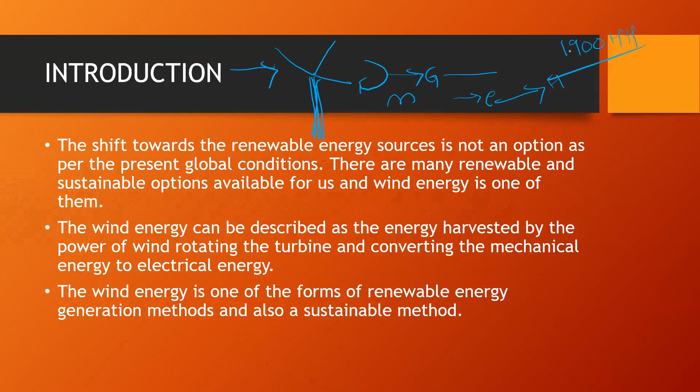The generator uses the mechanical force from the turbine and converts it into electrical energy, which is supplied to regular households. One wind turbine at its full capacity can serve up to a maximum of 1900 households. Wind energy is one of the forms of renewable energy, which is a renewable and also a sustainable method.

The types of wind energy systems. There are two types of wind energy systems, onshore and offshore, based on the placement of wind turbines. The onshore wind energy systems are the regular wind energy systems which we see mostly. These are the most common type of wind energy system, where the wind turbines are installed on land and mostly connected to the grid, and they provide direct distribution of the power for usage.

Mostly, the regular wind turbines are onshore wind turbines. They generate electricity, which is connected to the grid, which supplies our homes for our usage. And there are the offshore wind energy systems, which contain wind turbines anchored to the seabed, as there are much stronger winds over water bodies. In the water bodies, there are high winds with high pressure, so the wind turbines are placed there to get a higher output.

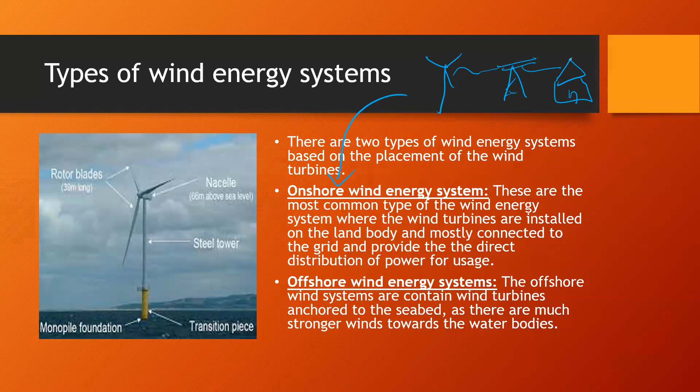The offshore wind energy system. Offshore wind energy is a renewable energy solution with enormous potential. By placing wind turbines at sea, in either shallow or deep waters, we can harness the power of the wind to generate electricity. Offshore wind energy presents several advantages over onshore wind energy systems. One of the most significant benefits is the strength and consistency of wind resources at sea.

Due to the high pressure created by the sea, there are high winds over the sea. So by placing the wind turbines there, we can generate a higher amount of wind energy compared to onshore wind turbines. Unlike onshore locations, which may have variable wind patterns, offshore sites often experience more consistent and stronger winds. This results in higher energy yield and more reliable power generation.

Suppose you place onshore wind energy systems in the plains, on the hills, or near plateaus. The winds change based on the seasons and based on the places. But in the sea, the winds are mostly consistent and stronger.

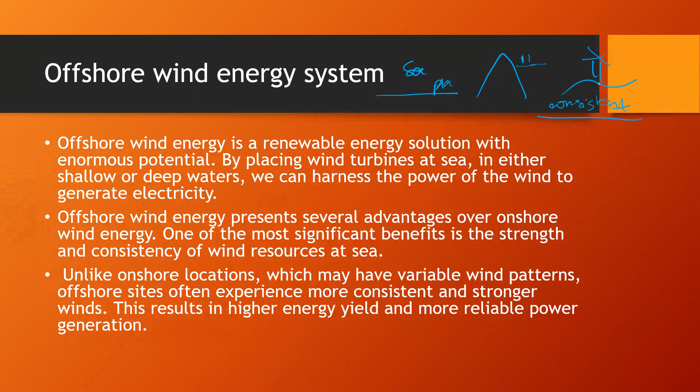The offshore wind energy placement. The placement of offshore wind energy systems is based on various factors. Offshore wind farms should be placed in areas with consistent and strong wind resources. These areas are often found along coastlines where offshore wind blows consistently. The water depth at the chosen location is a significant factor.

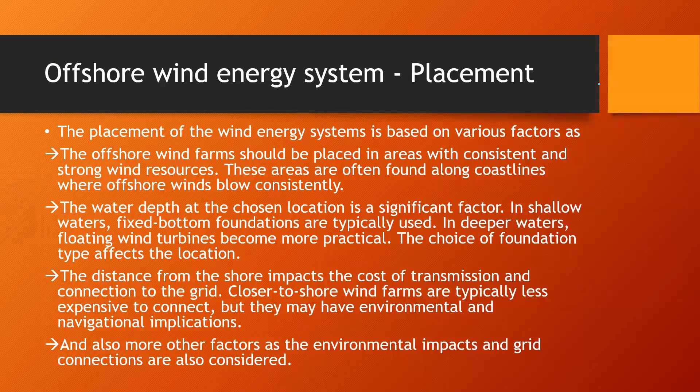In shallow waters, fixed bottom foundations are typically used. In deeper waters, floating wind turbines become more practical. This choice of foundation type affects the location. The distance from the shore impacts the cost of transmission and connection to the grid. Wind farms closer to the shore are typically less expensive to connect, but have environmental and navigational impacts. Other factors such as environmental impacts and grid connections are also considered.

Here we can see the types of offshore wind turbines based on the water. Mostly, the ones with the fixed support are of shallow water. That is, water is less depth compared to this. Here, the water is less depth compared to these three. Here, the wind turbines are having fixed supports to the ground.

They are placed in the shallow waters, but these are consisting in the seabeds with floating supports to these turbines. As the depth increases, there are different types of floating supports such as semi-submersible, spar buoy, and tension leg platform.

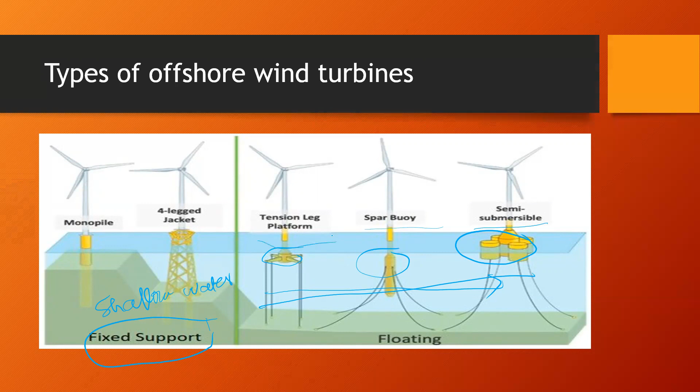Global and national role in offshore energy. As per the recent studies, the global capacity of the offshore wind energy is over 57 gigawatts, where Europe is the largest producer of the offshore power, followed by China and United States. The offshore energy contributes around 10% of the total global wind energy capacity.

The global and the national offshore wind energy is a project implemented from December 2013 to March 2018 by a consortium led by Global Wind Energy Council or GWEC and supported by the European Union to assist India in its offshore wind power development and in turn contribute to India's power transition towards use of clean technologies in power sector.

Here we can see how the global and our country's role is increasing and the result of offshore wind energy turbines are also increasing and it's getting recognized.

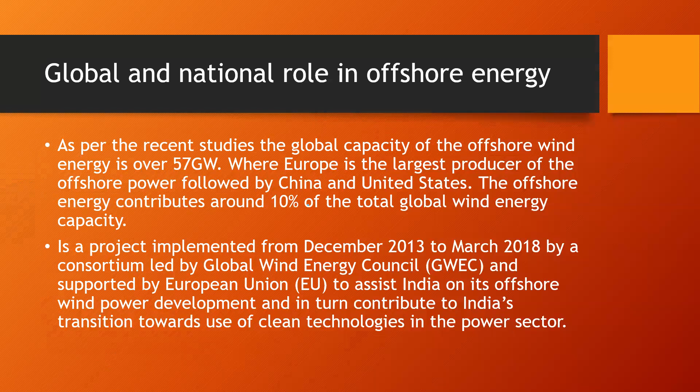Future scenarios of offshore. Offshore wind energy has a potential to play a major role in the world's transition to clean energy future. It is a clean, renewable, and abundant resource that can be harnessed to generate electricity without emitting greenhouse gases or other pollutants. The future promise of offshore wind energy is vast.

The Global Wind Energy Council or GWEC estimates that offshore wind could generate up to 420,000 terawatt hours or TWh of electricity per year, which is more than 18 times the current global scenario. As we can see here, if the offshore wind energy is properly utilized everywhere, it is more than sufficient, or to say 18 times the current global electricity demand. This means the offshore wind energy could theoretically cover all of humanity's electrical needs.

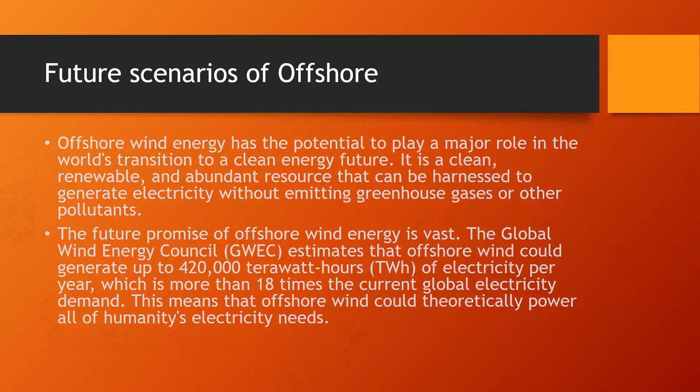There are several factors that are driving the growth of offshore wind energy. First, the cost of offshore wind has fallen dramatically in recent years, making it a more competitive option for electricity generation. Secondly, technological advancements have made it possible to build offshore wind turbines in deeper waters and harsher environments. Third, governments around the world are setting ambitious targets for renewable energy deployment, and offshore wind is seen as a key technology to help us meet these targets.

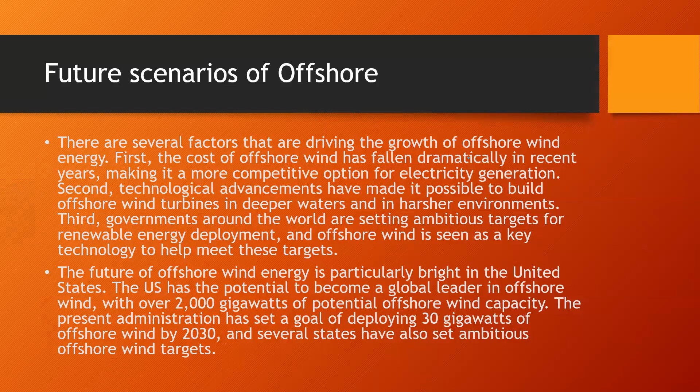The future of offshore wind is particularly bright in the United States. The US has the potential to become a global leader in offshore wind, with over 2,000 gigawatts of potential offshore wind capacity. The present administration has set a goal of deploying 30 gigawatts of offshore wind by 2030, and several states have also set ambitious offshore wind targets.

India's future scenario in offshore wind energy. While India is still in the early stages of offshore wind development, there is a lot of progress being made. In 2022, the Indian government awarded its first offshore wind contract, totaling 1 gigawatt of capacity. These projects are expected to be operational by 2025.

The Indian government has set an ambitious target for offshore wind deployment in 2015. The government released a national offshore wind energy policy setting a target of 5 gigawatts of offshore wind capacity by 2022 and 30 gigawatts by 2030.

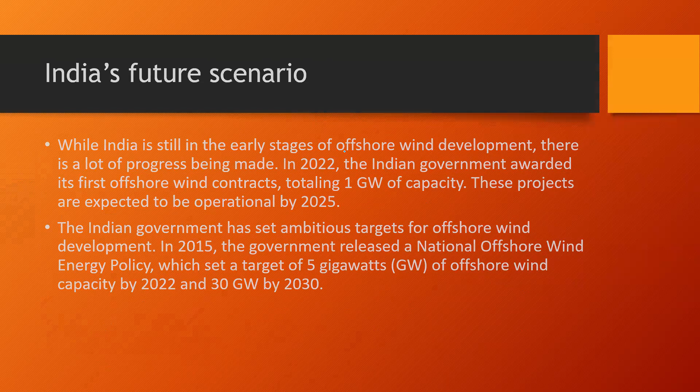The factors to improve offshore wind energy. There are a number of factors which are helping to drive growth of offshore wind energy, such as falling costs. The cost of offshore wind has fallen dramatically in recent years, making it a more competitive option for electricity generation. Technological advancements. Technological advancements have made it possible to build offshore wind turbines in deeper waters and in harsher environments. This has expanded the areas where offshore wind can be developed.

Increased demand for clean energy. There is a growing demand for clean energy around the world as countries seek to reduce their greenhouse gas emissions and combat climate change.